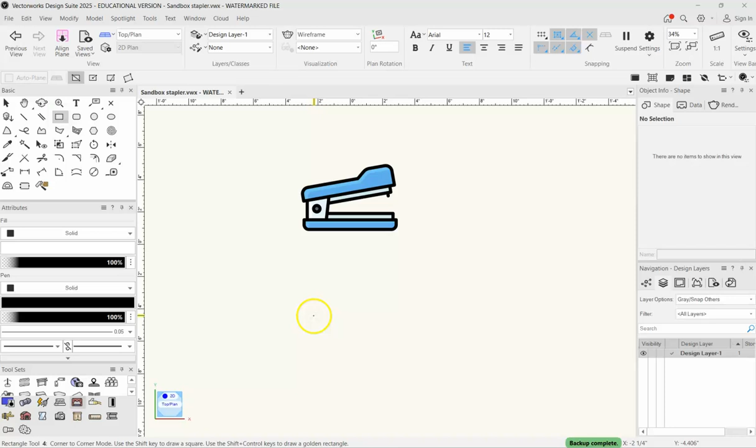I'm going to start with a rectangle tool for that bottom blue chunk. About like that. This top one is on an angle, but it might be easier actually for me to construct it and then just tip it up using the rotate tool. So I'm going to do another rectangle for that. And then if I hover over this point, you'll see that green line will kick in. And so that will make sure that we are the same size there. Just lift that up a little bit.

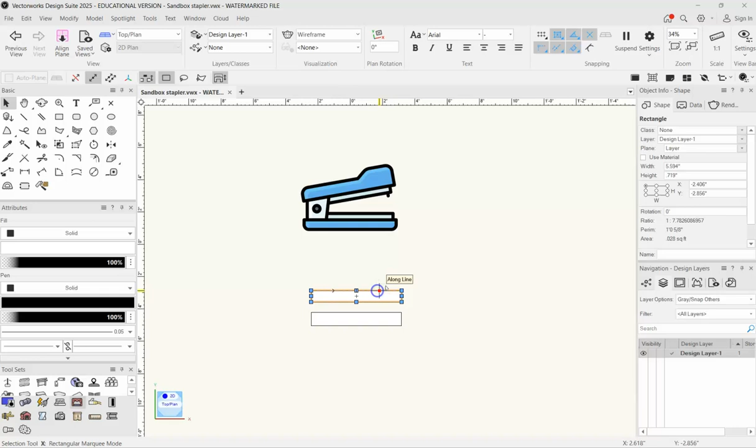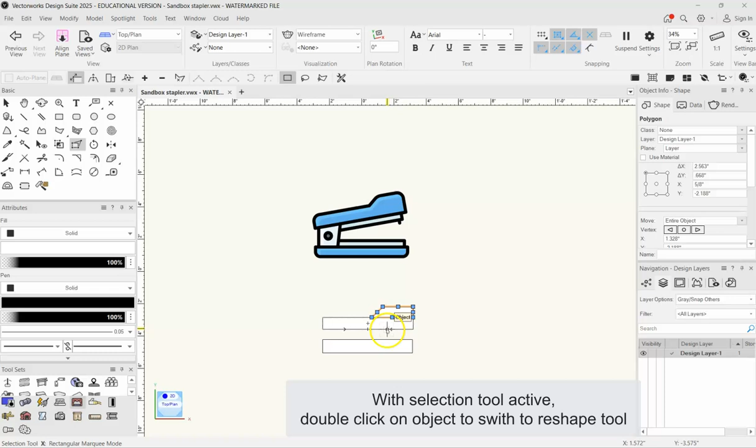Now I'll do this little bump up here. About like that. Now I'm just going to double click to bring up my reshape tool and I'll slide that back. Now these two can become one thing, so I'll clump them together, modify, add surface. So there's our top. Next thing we want to do is get all these nice little rounded corners. That's going to be done using our fillet tool.

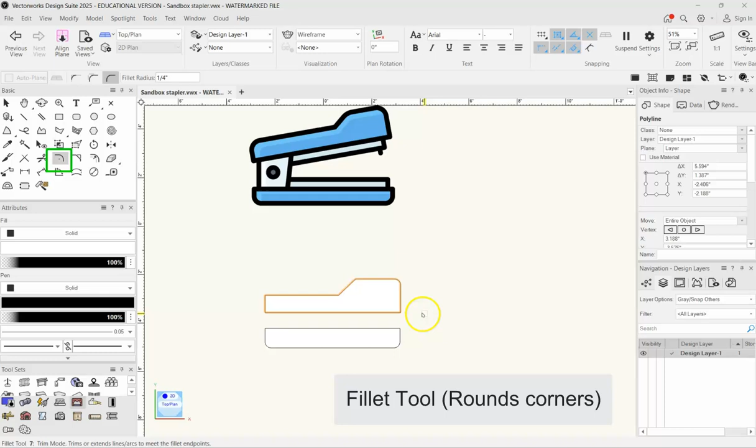So we'll select that. And we'll just start selecting edges that we want rounded. That corner. That one could actually be a little bit bigger, perhaps. Yeah, let's redo that one. I'll change it from 1/4 inch to 1/2 inch here. And we'll go back to 1/4 inch. And that's most of those.

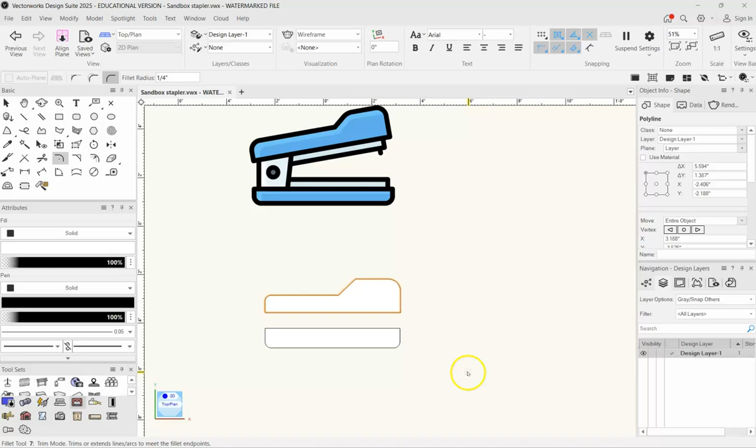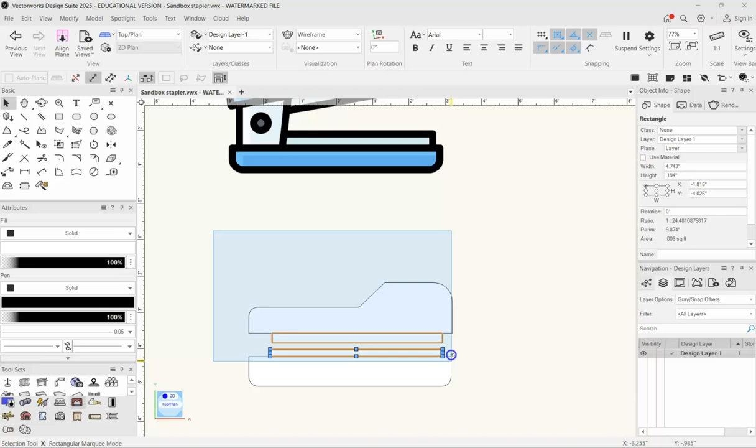I'll add this little piece that goes under there as well. About like that. And I'll add this one on top here. Just doing rectangles. Really not too hard. Now I'll select these and I'll go ahead and spin them up. So with both of them selected, first click will set our point. Second click will add that, and then we can tip it up to whatever we like. And that seems decent for me.

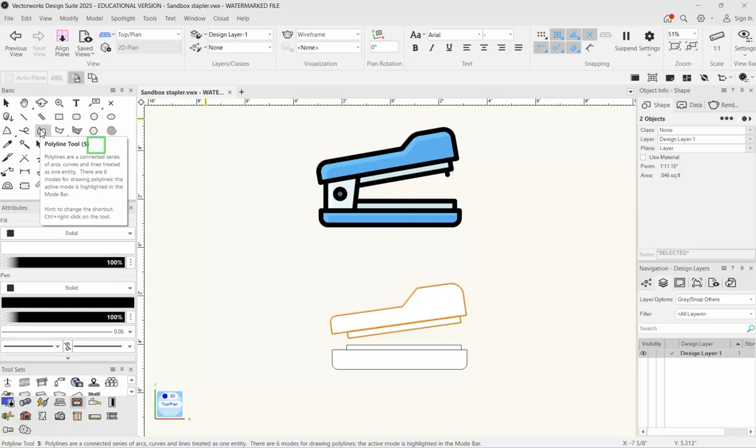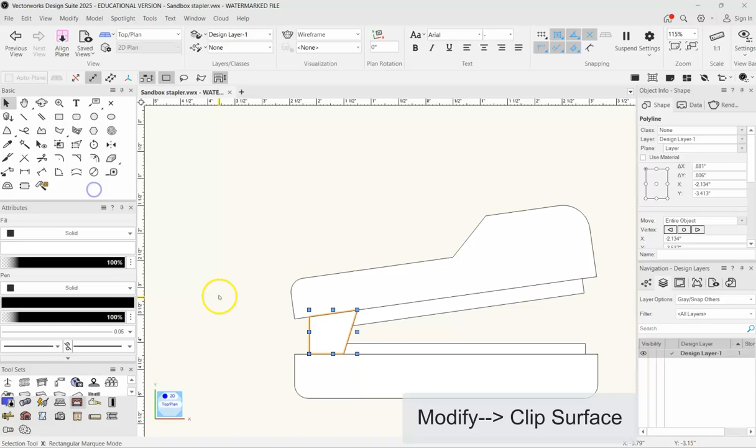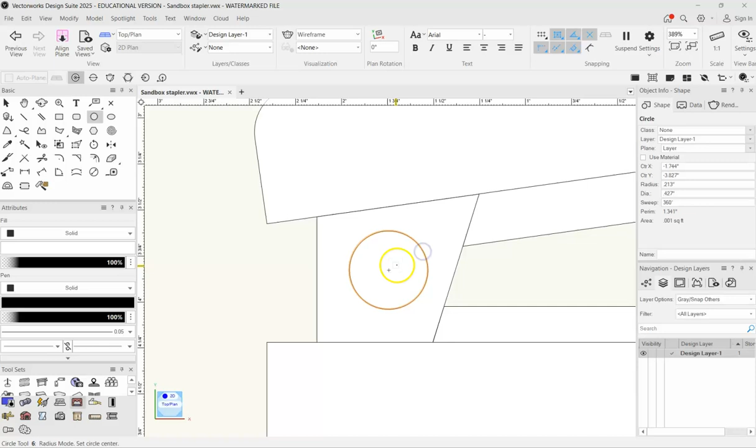Next, we will go ahead and grab our polyline tool and make this little shape here. We'll come to about there. There we go. Now we don't have to, but if we wanted to, we could clean this up a little bit. I can select both of those. Modify, clip, so that now that's a little cleaner. Select. I'll clip that one as well, just to make it a little cleaner. We'll just grab our circle, come in here, and draw two nice little circles in there.

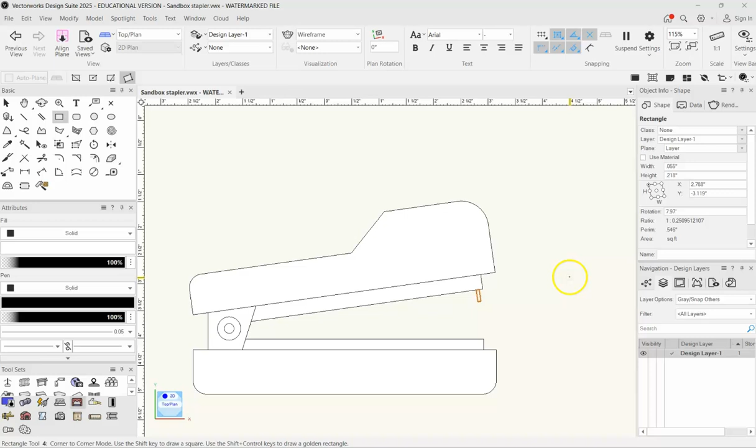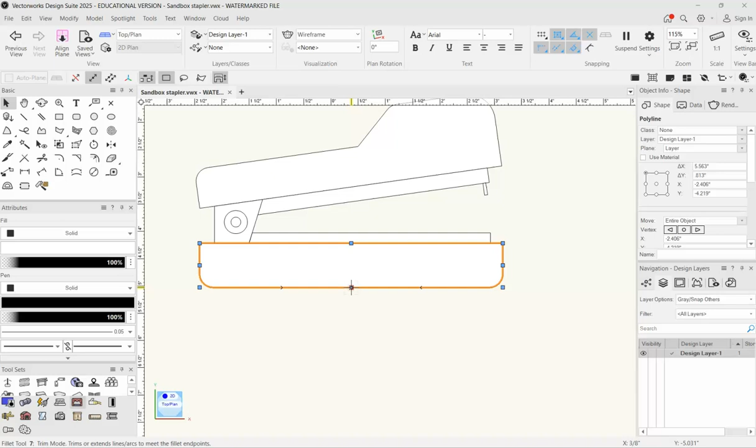Now we're missing the little nubbin here off the front. So I'll grab my rectangle tool, and this time I'll use the 3-point rotated so that I can draw a rectangle on an angle. There we go. It's looking pretty good. Ooh, this one here needs a little fillet. There we go. And that's sort of the basics of that. Then you can come in, this one's a little wonky, a little large, and you can just reshape as needed.

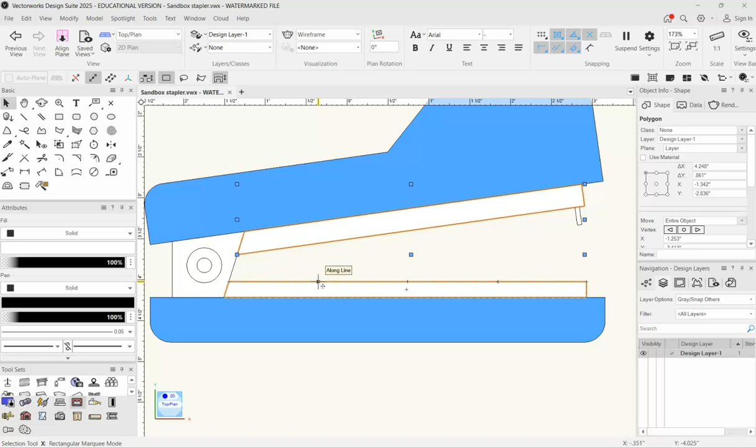If you wanted to, you can play with attributes. So let's select those two parts. We'll come over to their attributes. I'll select the color. I don't know, that's not quite it. Good enough for now, I suppose. You can select multiple objects and handle them at the same time. And this little guy, we'll just make it black.

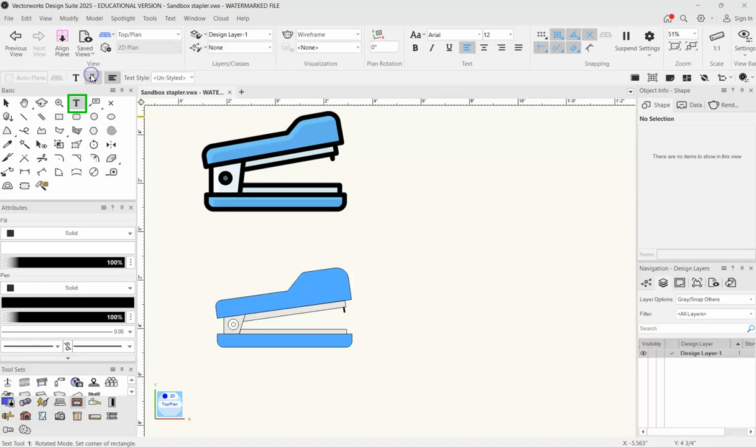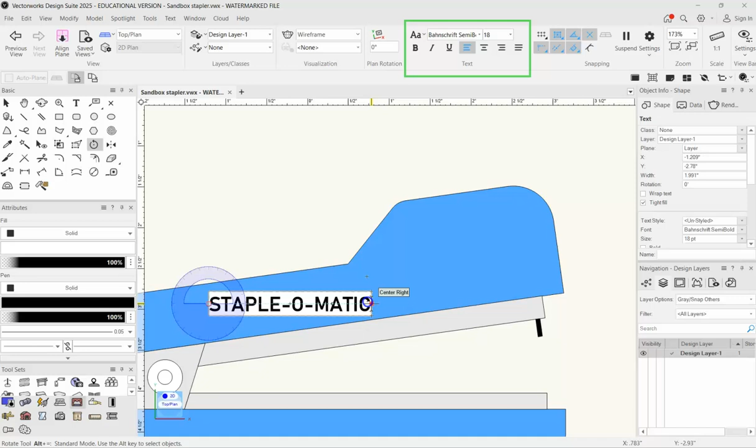If you wanted to, you could come in here. So let's drop some text on here. Staple-o-matic. Great. Sure. Plop that on there. Rotate it. And see how it's white there? That's because this text box has a fill of its own. So with it selected, I can just come in and instead of it being a solid white, I can just change that to no fill.

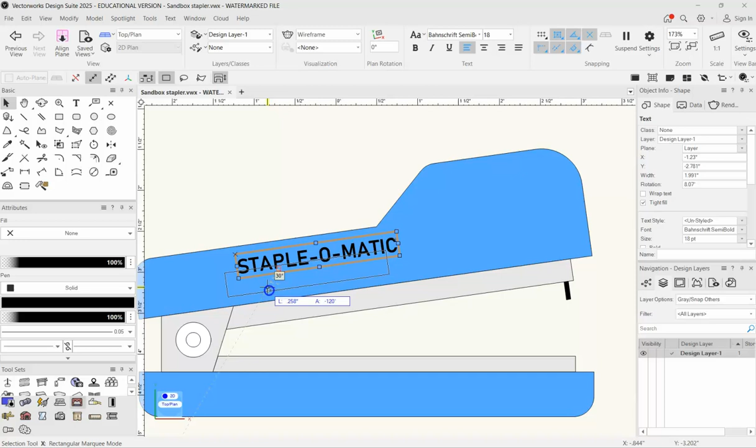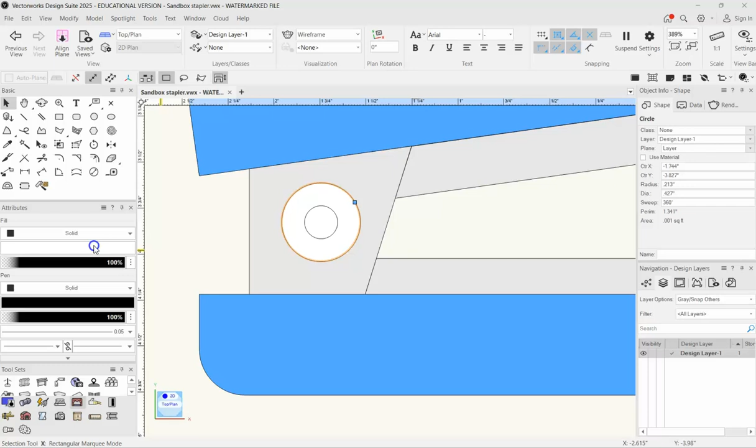And there we go. Another little tip, say I want to adjust this a little bit, but as I'm dragging around, it's snapping to things weird. If you have something selected, if you just hold Shift, you can use your arrow keys to just nudge things around if you wanted to nudge like that. So that's our stapler. Not too bad. You can make these a little darker. Now let's do one more.

So you could import images into Vectorworks. If you go up to File, Import Image Document, then you just select whatever you want. Let's do a tape dispenser too. We're going to do all of our desktop junk. Okay, so to start this, I would probably, let's tackle this top part here that's in the lighter gray. That's going to probably be the hardest part of this. So we could do a couple different things.

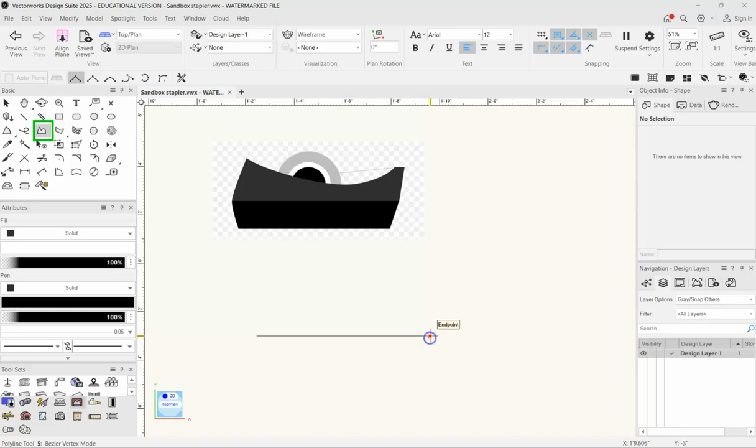One, we could use a polyline tool. So using that, you would strike out like that. And as you're using this tool, right now I'm in corner vertex mode, you can switch to different modes as needed. So now we'll switch over to Bezier. Put it about there. And I'll switch back to corner.

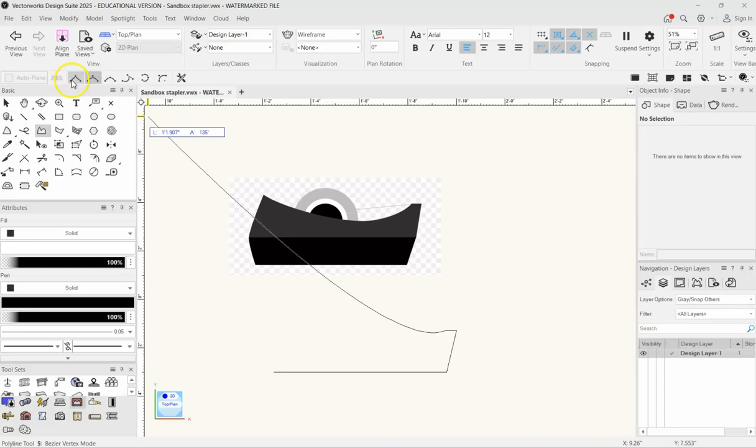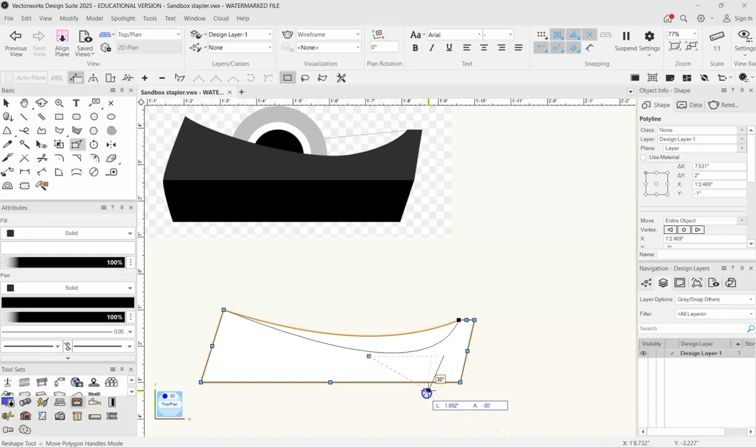So that's one way to do it. And again, you can reshape this. So if we pull up our reshape tool, because this was a Bezier curve, I can actually grab this handle and change that curve however I want. You can also reshape these. So something like that gets us pretty close, and that's all done using the polyline tool and then using reshape

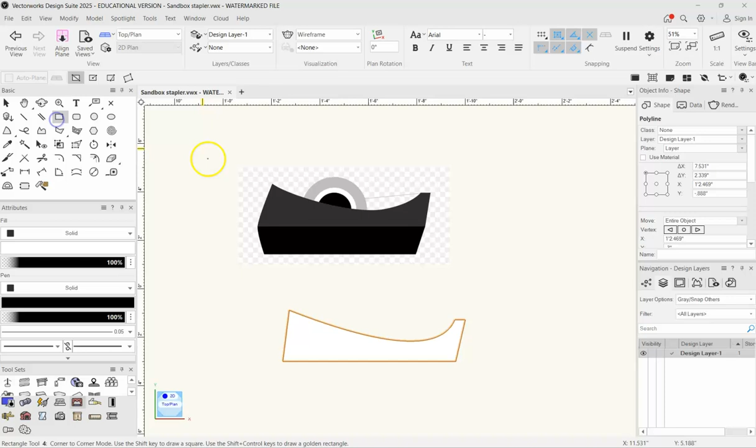on it. Another way you could do that would be subtractive, I suppose. So you would draw the main chunk of it, and then we would resize it. And then we could just grab like our freehand tool or something, and I could just draw an arc along here. And that gives us that same swoop. But now again, these are two separate things. So we have our swoop and we have our object.

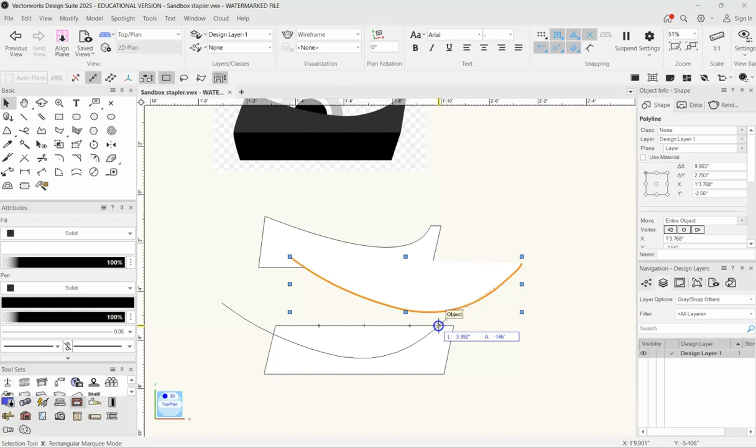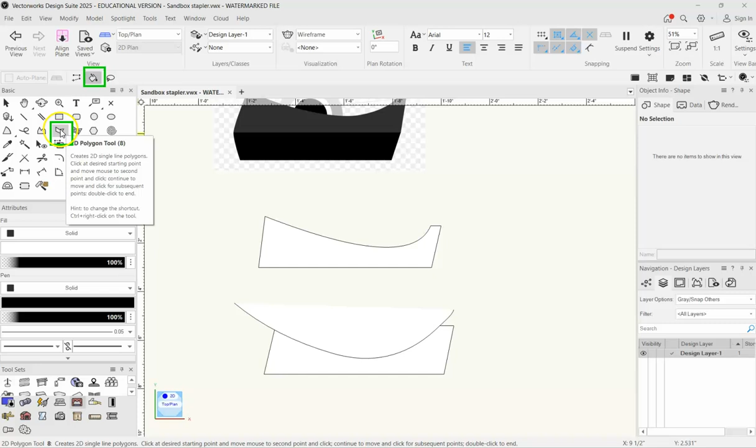So we could just play with this to get it to fall where we want it to. Something like that, maybe. Now what we want is just the area in here as opposed to this whole thing. So I would grab my 2D polygon tool with the bucket fill. And I would just click in here, and that creates a shape right there.

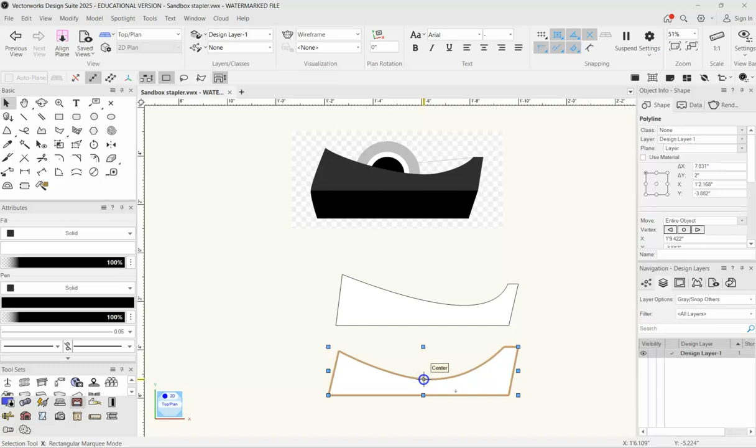So two different methods to get to ultimately a very similar result. I mean, they're clearly a little bit different, but you can play with it and see what works best for you. Let's get rid of one of these, and we will start this. So if I'm drawing this rectangle, I want it to be exactly lined up. If I hover over this endpoint for just a sec, you'll see the cursor has a red box around it. So now it'll track that line down, so I know that those are the same size.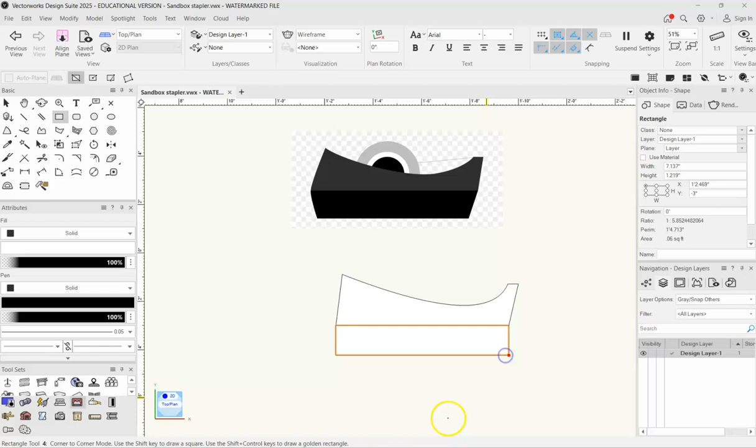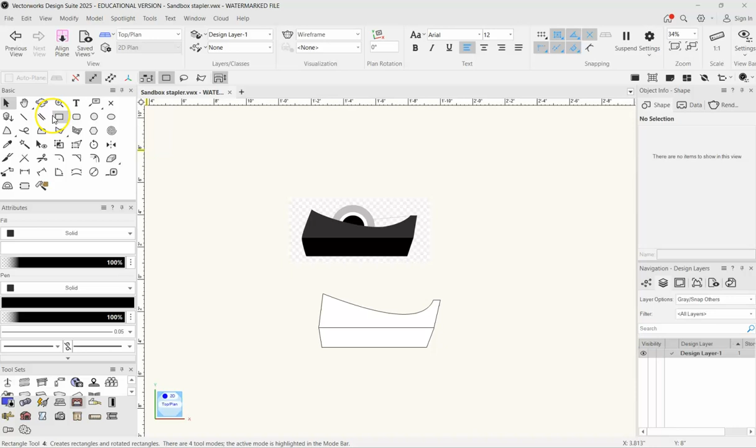You have a selection tool, double click to bring up my reshape. Something like that. That's not too bad. And then we just got to do our circles up here in that area. Something like that. Now actually let's make this into sort of a donut shape. So I have two circles, 1, 2.

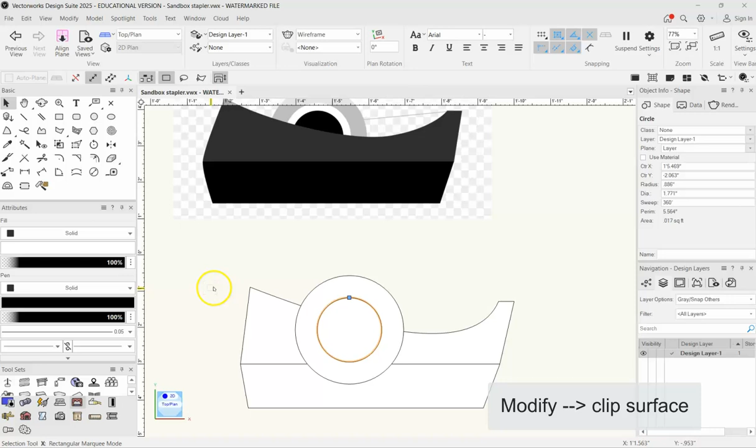If I select them both, holding Shift, if I come up to Clip Surface, so now it's cut this center circle out of the outer circle. So I can select that one and just hit delete. And I'm left with a donut here. And I can again move that to wherever I want it, like that. Now for this project, I could just hide the rest of this circle behind the tape there, but you could do that by Control B for send to back. Now it's hidden back there.

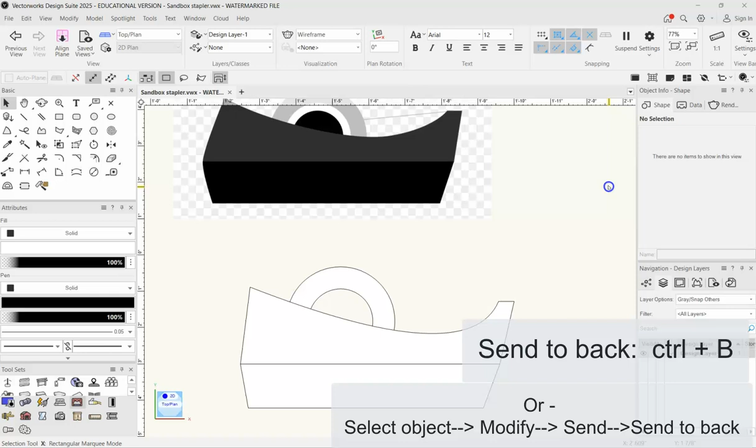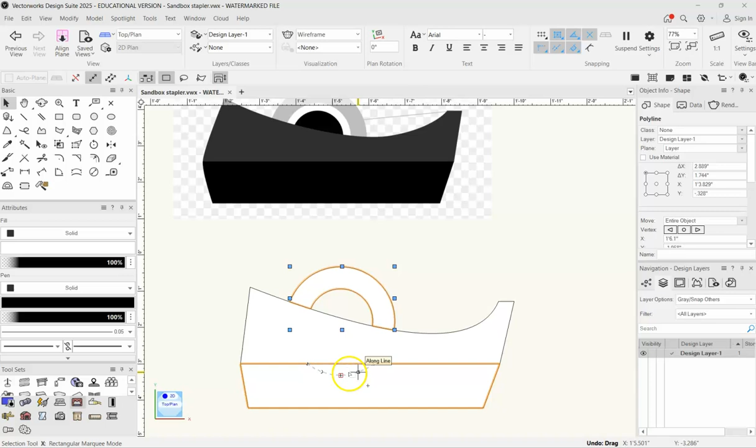If I wanted to clean it up a little bit more, I could select that and this and just go to Modify Clip Surface. So now we essentially just have that bit. And there's still probably a little bit hovering back here, which you can leave, or you could find it like that just by trying to select it. You can also, if you hold down your B key, that's called the X-ray. So if you hold down B, it will show you what all's behind there. So if I'm holding B, I can look behind and select things that I ordinarily wouldn't be able to.

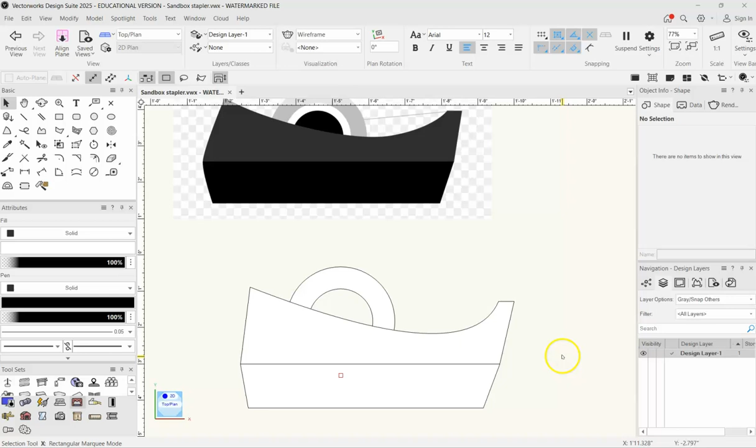So let's run this operation again. Those two, modify, clip. Now I know there's a little chunk down here floating somewhere. Hold the B key, and then I can select it. Release the B key, hit delete. I'll draw this last little loop. And you'll notice with snapping on, the new circle will snap to the center point of the previous donut, even though that donut is now an incomplete shape.

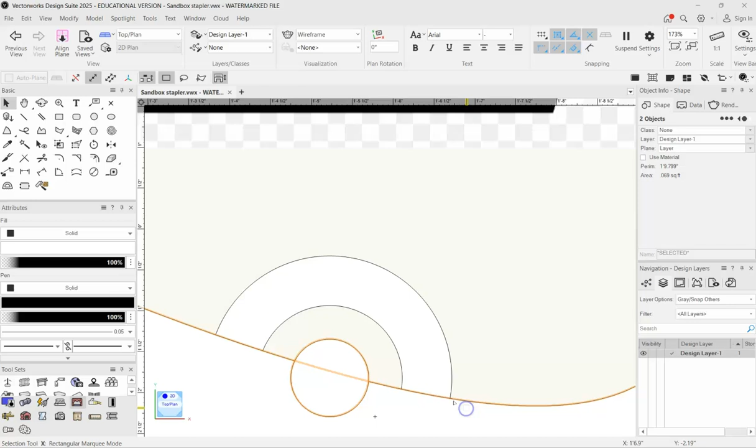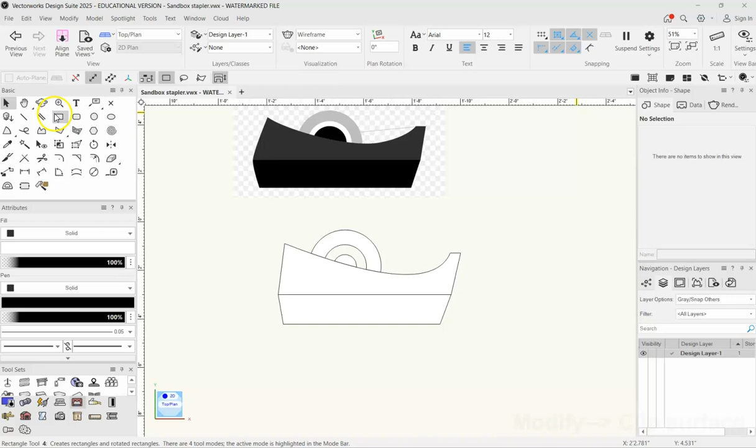Select both of those. Oh, and actually, if I were to clip these now, it would take the circle out of this piece, which I don't want. So I need to send this to the back first. Control B. Select both of those, modify, clip. And there's a little tape dispenser. And then we have the little tape line here, I suppose. So let's use my line tool.

There we go. And similar to this one, I could come in and color it and all that, but I don't think we need to at this point. Because really it's about just learning how to play with shapes and how to manipulate shapes. So try a couple of these on your own, find something, and just start drawing it to see what you can do with these different shapes.